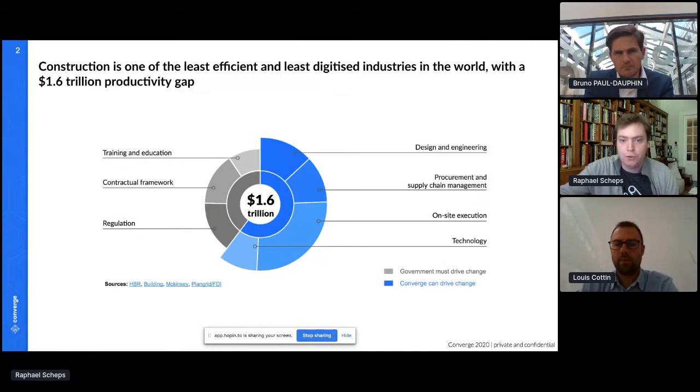So we believe Converge is best placed to bridge that productivity gap for one simple reason. Our entire model is based on driving efficiencies on the construction site through sensors and AI. So we collect physical data from sensors that may be placed on assets, on materials, on tools, in the environment itself. And then we fuse that data with what we call construction data.

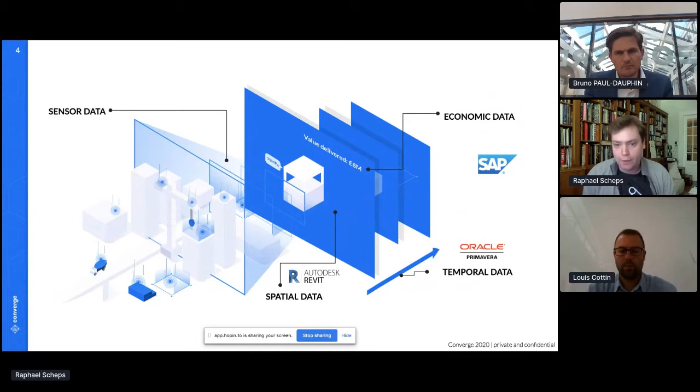So really at the core of Converge's technology layer, there's what we call construction DNA. And construction DNA takes that physical data from those sensors and links it into the BIM model, so the 3D model of the project, links it into program data, links it into economic data or sustainability data that might come from an ERP system. And when you start to fuse that physical data and that construction data, that's when you're able to really start orchestrating site activities in a much more efficient and sustainable way. And that core piece of technology permeates every product that we deliver to market.

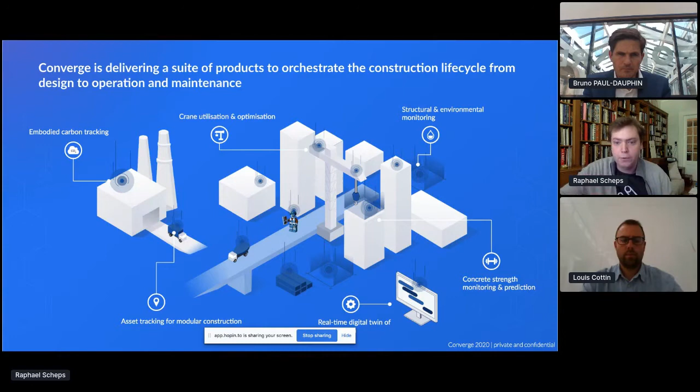And as I mentioned earlier, the vision really is to have sensors on everything. Sensors in concrete, which is where we started and what I'll do a deeper dive on in a second, but also sensors to monitor structural and environmental factors on the site, to start looking at the performance of assets, sensors to look at the logistics and the efficiency of the logistics process on the construction site. For example, on the crane, which is one of the major bottlenecks to the delivery of the site, but also in the off-site construction process. And all that data then feeds into this data engine that we call construction DNA.

Now, product number one that we shipped to market a few years ago and that we've now started scaling quite rapidly is called Concrete DNA.

And Concrete DNA is all about optimizing the concreting cycle on a site. So concrete is the second most widely used material in the world, and as I mentioned earlier, cement, one of its constituents, accounts for 7% of global carbon emissions. And it sits on the critical path of the majority of projects. If you can't deliver the next step of a construction site, typically it's because the concrete's not quite ready and you've got to wait for it to cure.

So what I'm going to do is I'm going to try and jump into a video which introduces Concrete DNA as a product. Hopefully this will work on this webinar. And let me know if it doesn't.

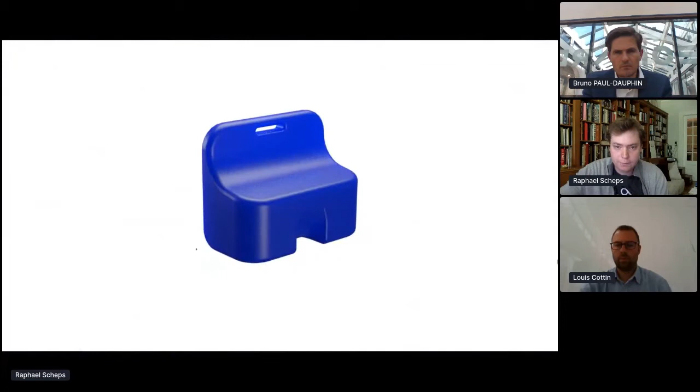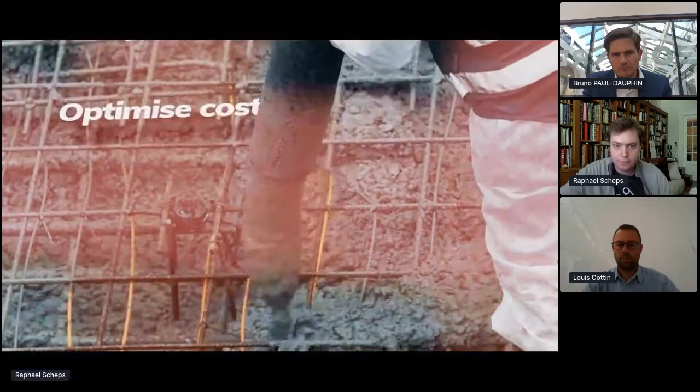At Converge, we've cracked the concrete genome. So we created Concrete DNA, your platform for analysis, prediction, and collaboration on your concrete pours. It's powered by this guy, Converge Signal. It's small and powerful. It sends real-time concrete strength data to Concrete DNA. It means you're going to optimize costs, strike faster, guarantee safety, and avoid delays. All of this whilst reducing your carbon footprint. It's good to be the good guy. And because Concrete DNA is in the cloud, teamwork has never been easier. Anyone can access the data from anywhere at any time.

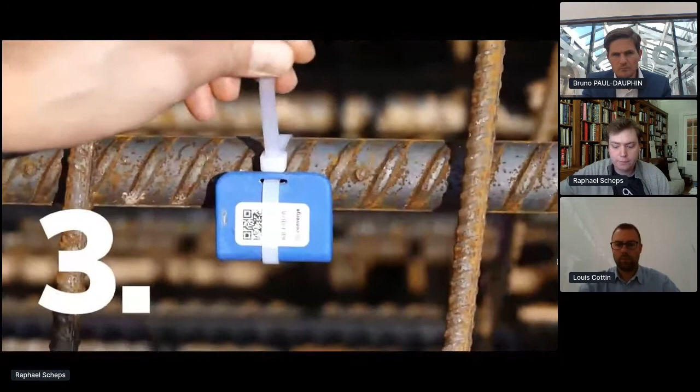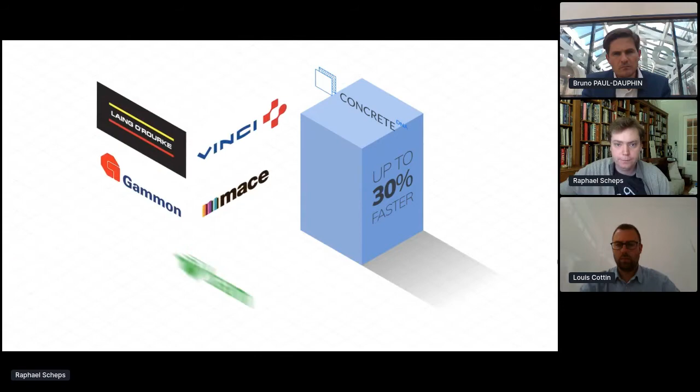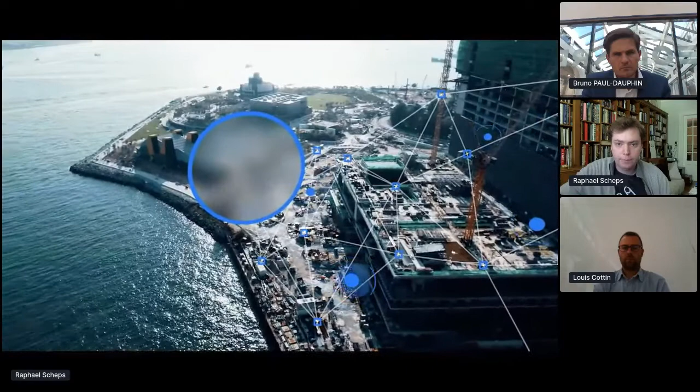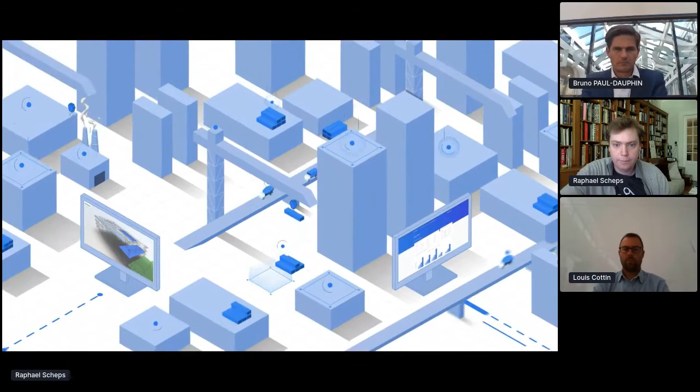Okay, but how simple is it to set up? That simple. And it's not just easy, it works. Concrete DNA has already helped build structures up to 30% faster, which is why some of the leading contractors around the world have been working with us and reaping the benefits. But concrete is just the foundation. Let's think bigger. We're building a network of sensors that form Construction DNA, the future of the job site. Tracking prefabricated assets, scheduling crane lifts, monitoring structural and environmental factors, all to optimize efficiency and sustainability. Construction DNA links data from sensors with BIM models, construction programs, and cost data to create a real-time digital twin of the job site. Join us to build the future, a world of interconnected sensors and an intelligent data platform where they all converge.

Cool. So that was a quick introduction to Concrete DNA and also where we're headed as a company. And I'll do a bit of a deeper dive now to talk about the value proposition and how Concrete DNA delivers value on construction sites and makes them more efficient.

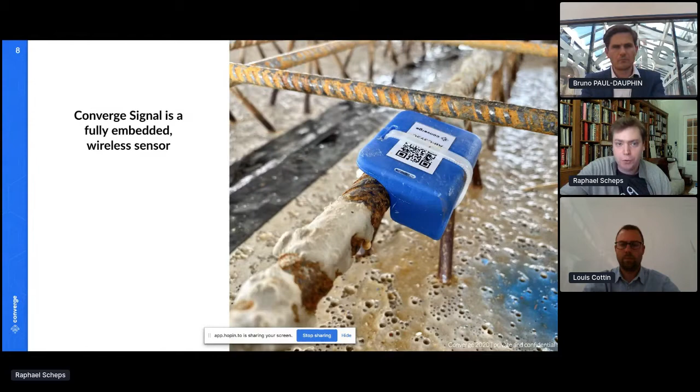Cool. So you can see the Converge Signal on the right of the screen. So Converge Signal is one of the hardware offerings that we provide as part of Concrete DNA. And it's a sensor that's fully embedded. So as you saw in that video, it's about 4 centimeters across. It's quite small. Gets attached to the reinforcement in the rebar in your concrete, and then helps you monitor that concrete in real time, providing a compressive strength curve, which is really what drives the program for construction sites.

There's then a mobile app that construction operatives, site engineers, principal engineers, and other stakeholders on the site are able to use to start tracking the performance of concrete in real time. And what they get to see is the temperature of that concrete, the relative humidity of that concrete, but most importantly, its strength. And strength drives the productivity of applications like post-tensioning, jumping core, tunnel segments, etc., which is where the majority of the operational efficiency improvements come from.

I think one of the coolest things that we've done as part of Concrete DNA is we've now gathered data from probably close to 15,000 sensors. There's well over 10 to 15 million data points on the performance of concrete in the field. And we've actually been able to now predict the behavior of concrete given the weather forecast. So this is the world's first use of AI to build a predictive engine that can actually tell you up to 5 days ahead of time with over 95% confidence levels when your concrete's going to hit strength, and as a result, when you're going to need resources to start taking action on that factor.

The other thing we've done is connect into BIM. So as we saw in that video, and as I mentioned earlier, Concrete DNA's core technology layer helps you start to understand how your progress is going from a sensor data perspective. So we start to link the physical data to the construction data.

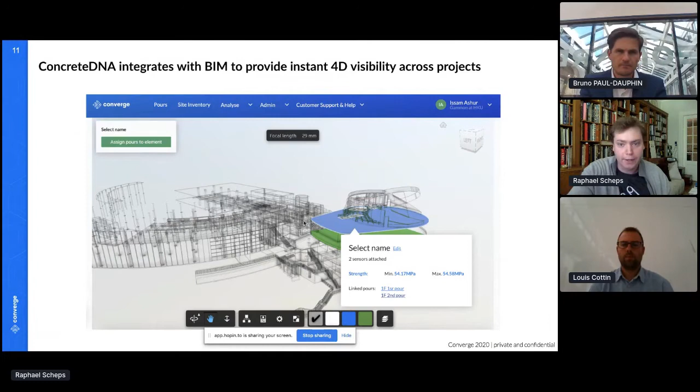And I'm quickly going to do an introduction or a demo to the product itself. So this is Concrete DNA Live, and you can see sensors on your screen here. You're able to click on them and actually start looking at data coming in for those sensors, the real-time strength, the temperature, and you can actually start to navigate across different sensors and click on a detailed view that allows you to actually start understanding how that specific concrete element is performing.

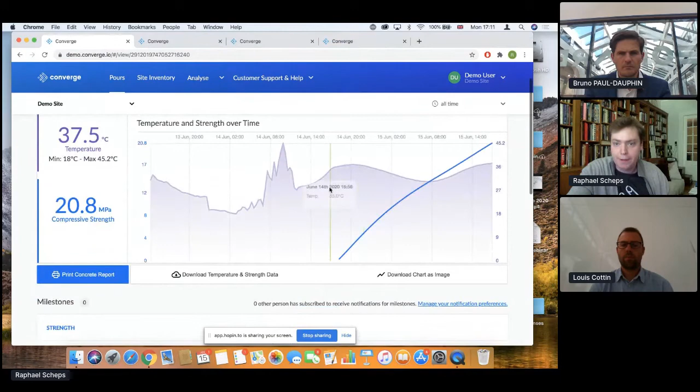And here you've got your predictions showing up in terms of when different strength milestones are going to be hit for that particular concrete pour.

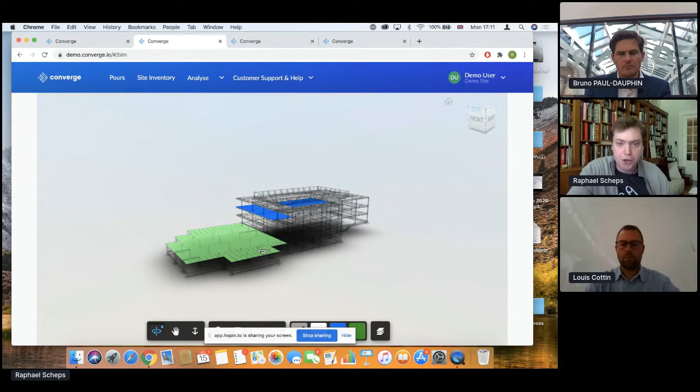You're then able to move into the BIM viewer. This is where we start linking physical sensor data into BIM, get an appreciation of progress in real time in a very visual way, and actually time step through progress on your site.

Finally, we aggregate that data so we're able to start understanding trends on your construction sites and how concrete drives the efficiencies and operational improvements on the project.

Now I'm briefly going to talk about a few of the use cases we've had within the Vinci group for our technology. The very first use of Concrete DNA within Vinci was at the Victoria Station upgrade. For those of you who live in London, you'll recognize Victoria Station as one of the biggest metro or tube stations.

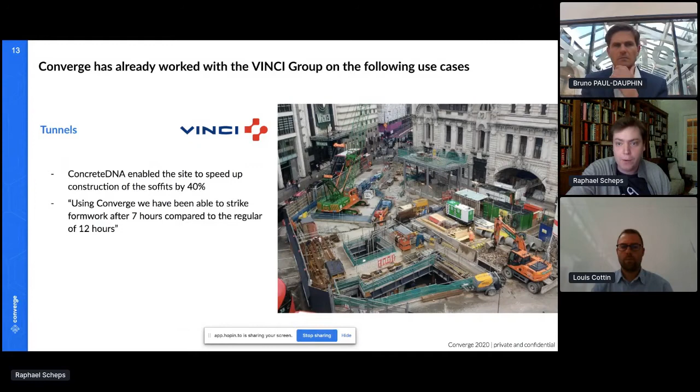Concrete DNA was used in the tunnel segments to start optimizing the speed at which the tunnel segments were built. It was a 24/7 job, and they were striking those tunnel segments after about 12 hours and then moving on to the next segment. With Converge, we were able to demonstrate that they could move from a 12-hour cycle to a 7-hour cycle, which compounded over that project is huge.

We've also worked with Bachy Soletanche in the piling sector, where we've put our sensors and Concrete DNA to use in the piling environment to act as a quality assurance record for the temperature profile of the pile, and also the strength level of the pile, reducing a lot of admin around cube taking.

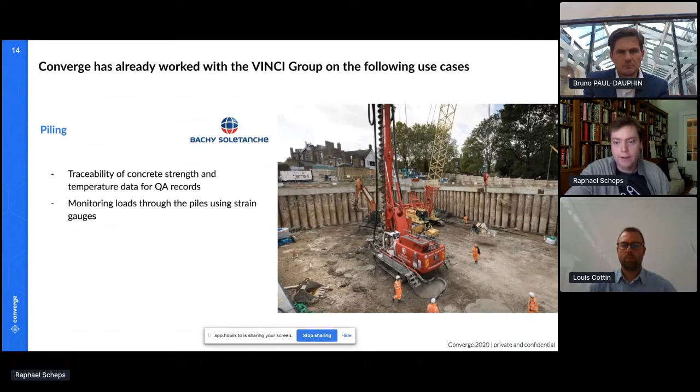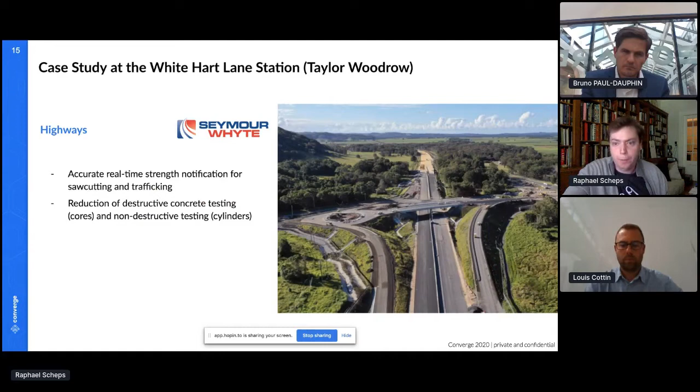Highways has been another sector, in particular concrete highways, where Seymour Whyte, one of Vinci's subsidiaries in Australia, made use of the Concrete DNA platform. It was all around optimizing activities like saw cutting and trafficking on the road itself. This is one of the major highway projects in Australia at the moment.

And then finally, rail, and I'll spend a bit more time talking about this specific use case because I think it's quite a compelling case study.

Concrete DNA was used to essentially help Taylor Woodrow, a UK subsidiary of the Vinci Group, build and underpin a rail structure that had about 13 archways. They had to build these concrete elements underneath the existing structure, and strength was critical to the program.

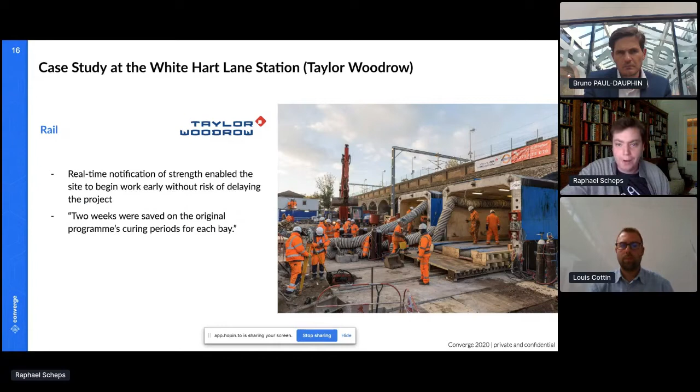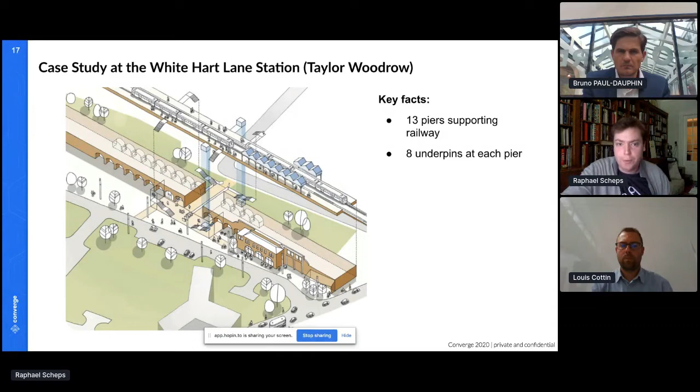So to explain the use case, you had about 13 archways, which you can see on the screen here. So 13 piers supporting the railway, and a new structure was going to be built on top. Underneath each pier, you had about 8 underpins that needed to be built in a sequence. Concrete DNA helped optimize that sequence, which was strength dependent.

Every time a new bay had to be built, it had to be excavated, the concrete had to be poured, and then the site operatives had to wait until that concrete reached a strength of 2 megapascals before they were able to grout. That was milestone number one that we were optimizing.

We were then having to wait for the underpinning to complete and for the concrete to reach a strength of 15 MPa before you could excavate the next bay. So that whole cycle was completely concrete dependent.

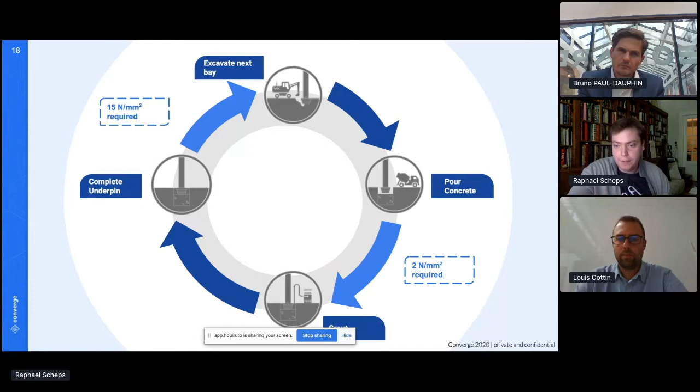As you can see on the slides, we were able to demonstrate and move from a 2-day cycle to a 1-day cycle. So Taylor Woodrow worked additional shifts and was able to create a 50% saving on program, which on that month-long construction schedule was able to save about 2 weeks, which is huge, both in regards to the operation of the structure, but also in regards to just delivering on time and optimizing efficiencies on the sites.

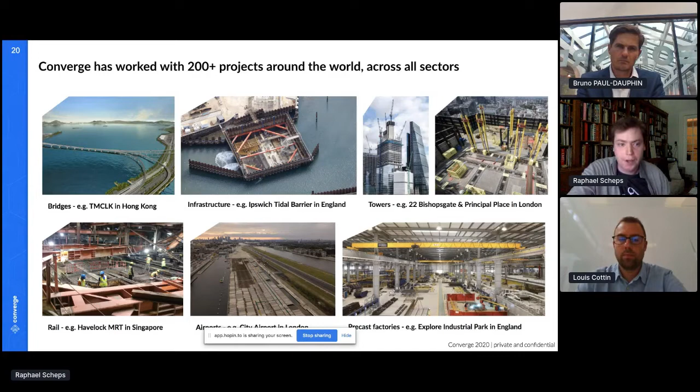And so, as I mentioned, the technology is applicable to many different sectors, from bridges to infrastructure to high-rise or prefabrication. So that's really just the beginning. And as the video touched on earlier, this all fits into a much bigger future that we're trying to create, where the job site is smart and sensors are driving and creating data from pretty much anything.

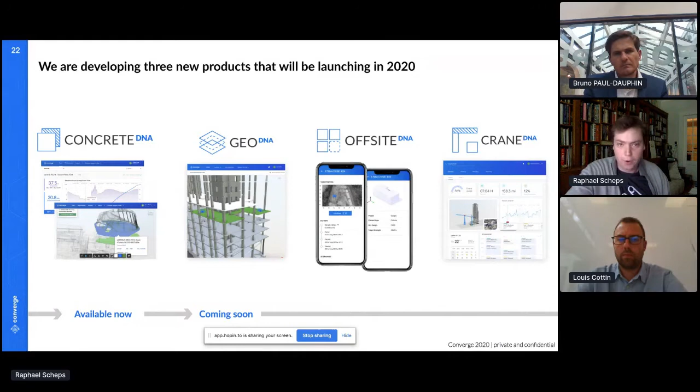We've got 3 new products on the way: GeoDNA, Offsite DNA, and Crane DNA. Each of these uses a component of physical sensing on the site, coupled with construction data to help optimize the delivery of a particular problem. All of them fit into construction DNA, which is the data platform.

GeoDNA is all about structural and geotechnical monitoring. We're extending the Converge Signal, the hardware sensor you saw earlier, to start monitoring parameters like tilt, movement, vibration, load, and strain. That's being used in structures to understand their performance, both during construction to optimize temporary works and construction sequencing, but also after construction.

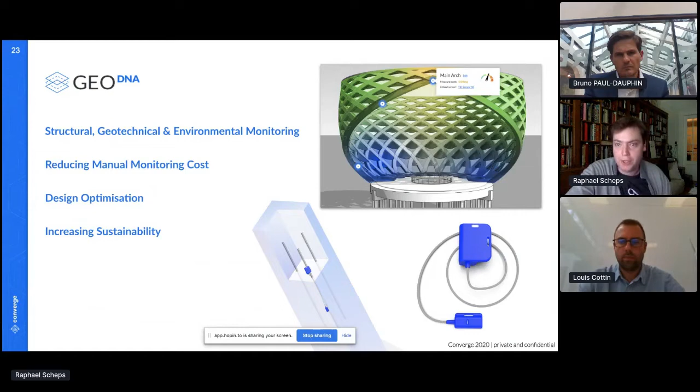Today, the sensor, which is embedded, lasts between 2 to 5 years. We hope to get that to a decade, and if not multiple decades one day, so we're able to have the sensor last as long as the design life of that particular structure.

Offsite DNA is all around prefabrication and the optimization of the logistics process for offsite construction. We're starting to use sensor data to optimize the delivery and logistics routes for modular construction, and also looking at sustainability, understanding the carbon impact of those delivery routes, so you can minimize the embodied carbon in that construction process.

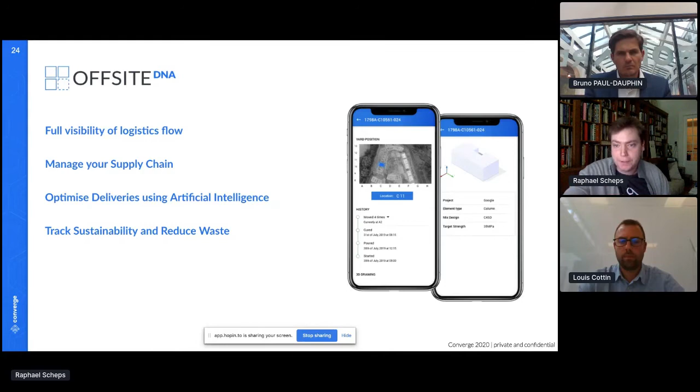Finally, Crane DNA looks at the on-site logistics, looking at sensors from the crane to optimize crane sequencing, lift scheduling, crane cycles, etc., and all the activities that flow from the crane.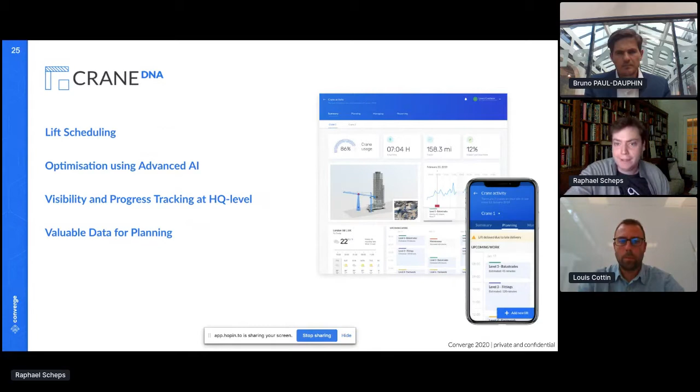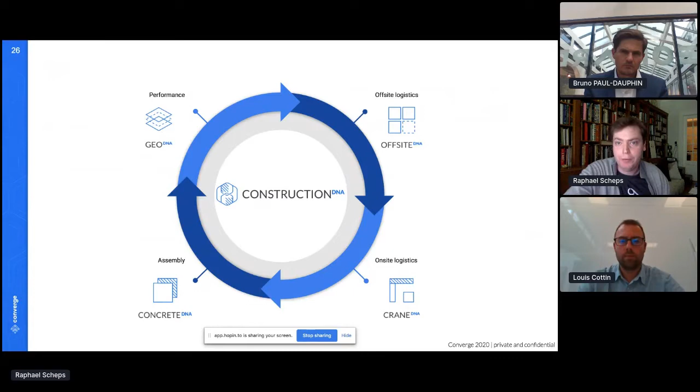The vision is to get an integrated view where Offsite DNA, Crane DNA, Concrete DNA, and GeoDNA all work together, feeding into construction DNA and providing a holistic view of the whole construction site. And it doesn't really stop there. The more data feeds you get, the more value you're going to be able to drive.

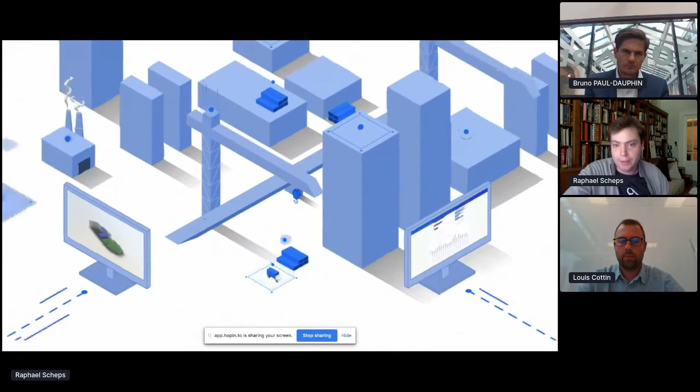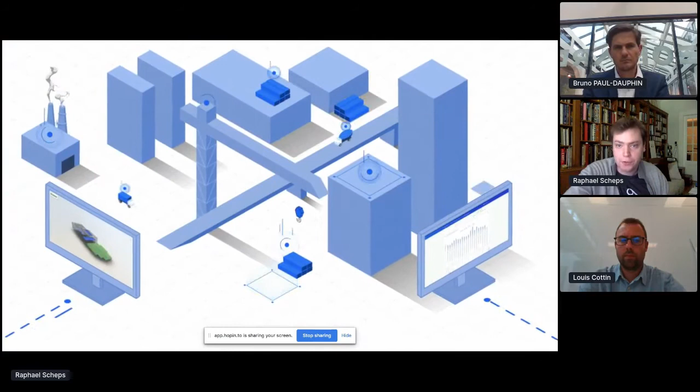We demonstrated between 30 and 40% operational savings when it comes to Concrete DNA. When you start to add data streams across multiple processes on the construction site, that's when you start to benefit from the synergies. And that's when things get really powerful, leading into this vision for construction DNA: the digital twin, or physical intelligence layer, that connects all those data feeds and provides the construction site with a global view of what's really going on, and the construction groups with a benchmark of performance across the wider portfolio of sites.

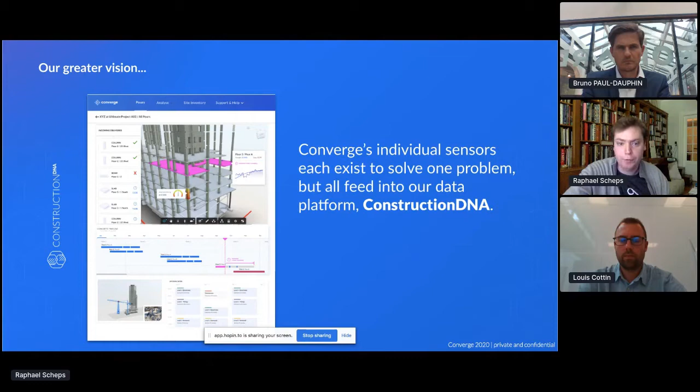And that's really an introduction to Converge.